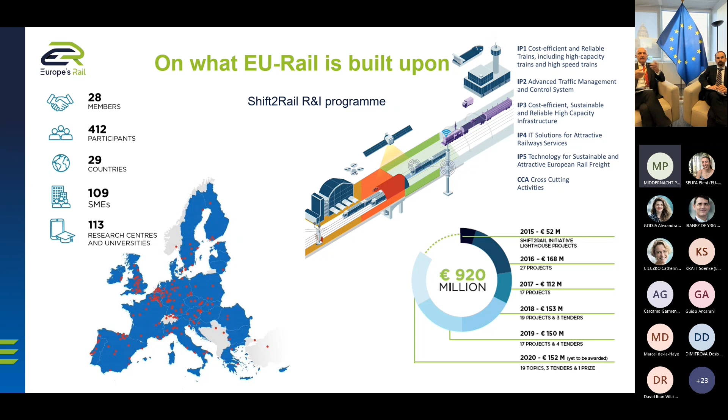The Master Plan and Multi-Annual Action Plan, the Multi-Annual Work Program of Europe's Rail, have been designed based on the results and the progress achieved by Shift to Rail.

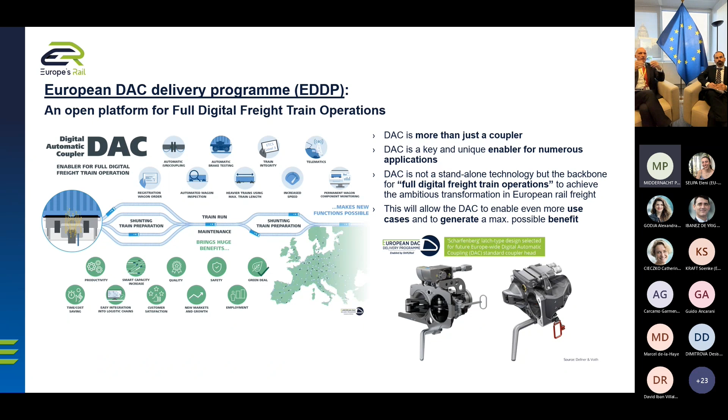I think this is a good example of the transition between the two programs. So now, as we start to discuss Europe's Rail, as I said, it's not a breaking point, it's simply an evolution from Shift to Rail to Europe's Rail. This evolution is in line perfectly with the evolution happening in the European Union, where the focus has been more and more on addressing the climate change impact and its consequences.

This came with the introduction of the European Green Deal by President von der Leyen, which later evolved into different elements of the policies of the European Union, one in particular the Sustainable and Smart Mobility Strategy, which is about how mobility and transport will have to evolve to become sustainable and smarter.

If you look at this document, I think it's quite interesting to see that the sustainability referred to rail is not about the fact that rail has to become greener and greener. Today, rail is green, is sustainable - well, unless you walk or take a bike. And yes, we need to do our due diligence, because there are a few elements we need to address.

First of all, we still have fossil fuel trains, largely diesel trains. We still have energy consumption that can be substantially improved in terms of efficiency. But what appears clearly from the Sustainable and Smart Mobility Strategy of the European Commission is that rail is the key agent for the overall achievement of sustainable transport and mobility.

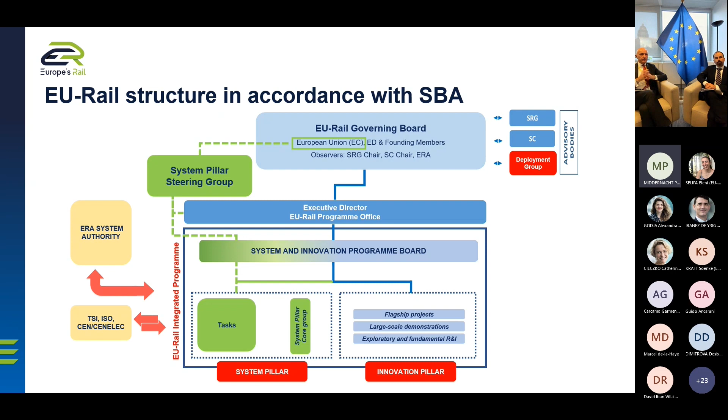But I would also like to highlight the relationship that is really fundamental with the state representative group, because rail is built upon the national system and national decision-making, and especially with the European Union Agency for Railways as a system authority for ERTMS, as for interoperability, safety and security. These are the key areas where we are working.

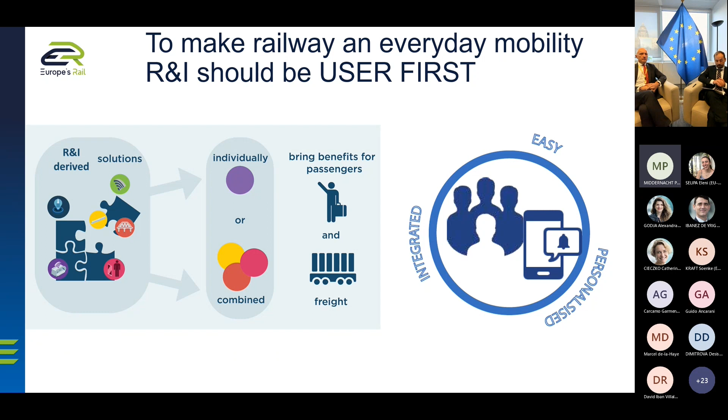If we go to the next slide, this one is most probably for the engineers, but especially to attract those who today maybe are not yet convinced that the future is rail—especially the younger generation, because we need to bring into the rail system all the brilliant minds that are looking at different ways of applying technologies, especially digitalization.

The rail system, if you look at it, is the perfect environment, the perfect test bed for playing with digitalization. Why am I saying this? Again, probably obvious for many of you, but it's good to put on paper: rail is a network, rail is a system, rail is supervised, rail is predictive. All of these are key ingredients to make a digital transition and make use of the digital functionalities we've seen, unfortunately, during the pandemic, but that were very useful.

For example, today we're using digital means ourselves. But also, to attract everybody, rail is green. Carlo mentioned it—it's already the next generation sustainable system, but we need to make it next generation as well.

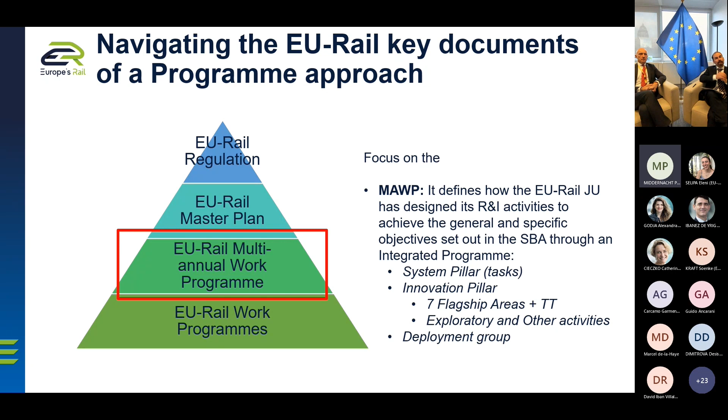If we go to the next slide, we can see that in the multi-annual work program we have 7 flagship areas. Those 7 flagship areas derive from the 5 priority areas that Carlo presented to you before, and without surprise, you can see a lot of analogies already from the titles.

Carlo also mentioned that we have granted the first project today with flagship project 1. So for each flagship area, there will be a flagship project, and in particular with flagship project 1, we're looking into different areas.

So we're looking into traffic planning, really trying to look at how to improve the strategic planning and the tactical planning of the availability of the capacity of the network, but this in a cross-border thinking. So it is not only about improving this strategic and tactical planning, including timetable optimization at national level, but also looking at how it integrates internationally at European Union scale.

And all of this we will integrate, of course, simulation and data-driven operations to make sure that we can have an efficient system. After the planning, there is the operation.

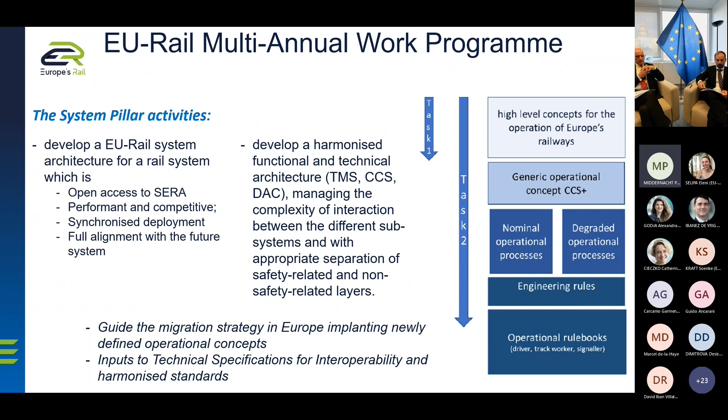If you go to the next one, we can see how we intend to implement the Europe's Rail program. You've already heard me talking about the implementation of the innovation pillar activities in calls. The first call has already been launched and closed. The second call is ongoing, and it deals with the exploratory research activities and flagship area 7.

Every year we will also launch this type of exploratory calls on a regular basis. On flagship areas 1 to 6, plus the transversal topic activities, we have a more multi-annual approach, as I was mentioning before, and for this we are planning 3 waves of calls. The second wave for the flagship areas that will generate flagship projects is planned around 25-26, and the third one in 2027.

For the system pillar activities, we have implemented it through a framework procurement process, and therefore we have today a framework contract in place with all the activities that will be launched according to the different needs. Lastly, the deployment group is also a key activity that will allow us to kickstart the reflection on how we integrate all these innovative technologies and solutions that have been demonstrated into the system at the highest TRL level possible, how we migrate that and how we deploy it into the system.

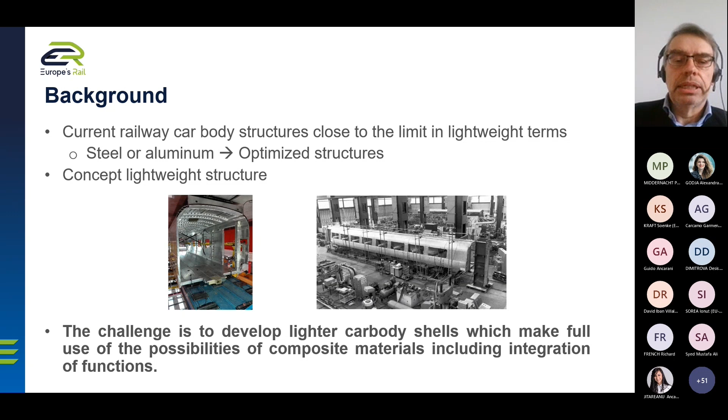Next slide, please. As already mentioned, why we are doing it.

Every saved kilogram is worth doing it, whether we look at the effect of reduced energy consumption from accelerating and braking less mass in the train set, or the possibility to introduce smaller traction systems and reduced braking systems since there's less mass to brake. Another side effect is that operation can be more efficient, as railway access fees would be reduced depending on the model the infrastructure manager is using.

Another possibility to reduce energy consumption is to look at the specific energy consumption per passenger per kilometer. If we invest a saved kilogram into carrying more people, the specific energy consumption will be reduced, and this ultimately leads to a more efficient and more attractive railway.

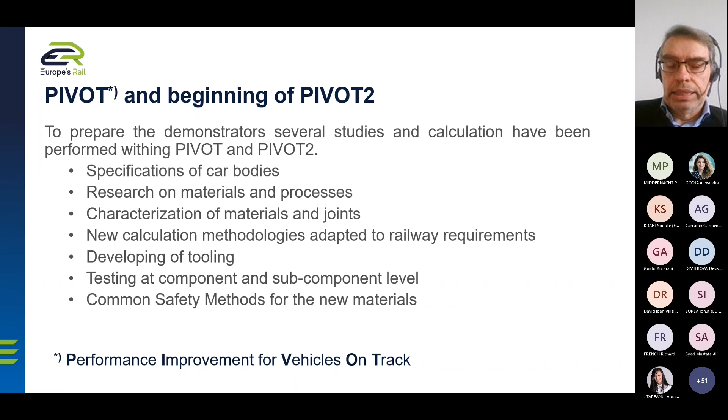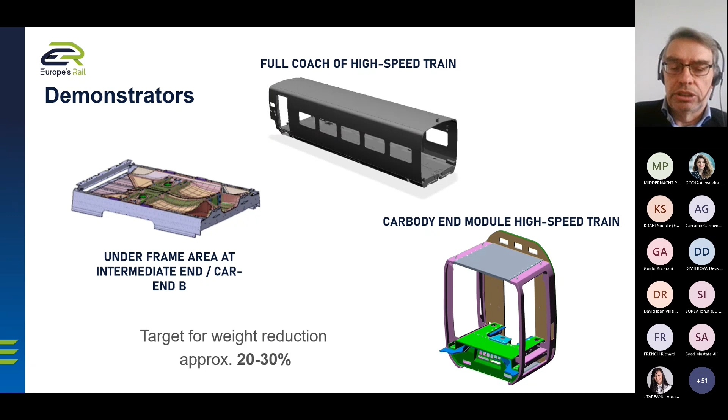Last but not least, Talgo developed a full coach of a high-speed train set, a roughly 13-meter-long high-speed car body which is under preparation. The target weight reduction we already achieved for each component or module is 20 to 30%, which is rather important.

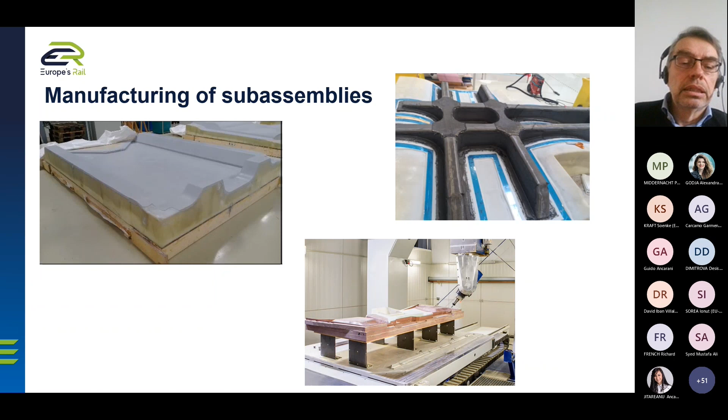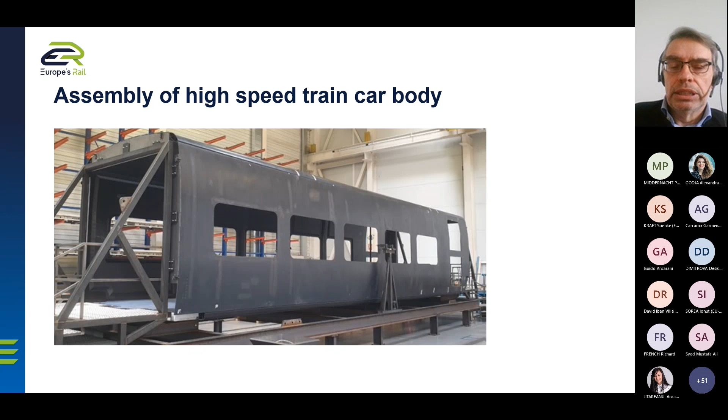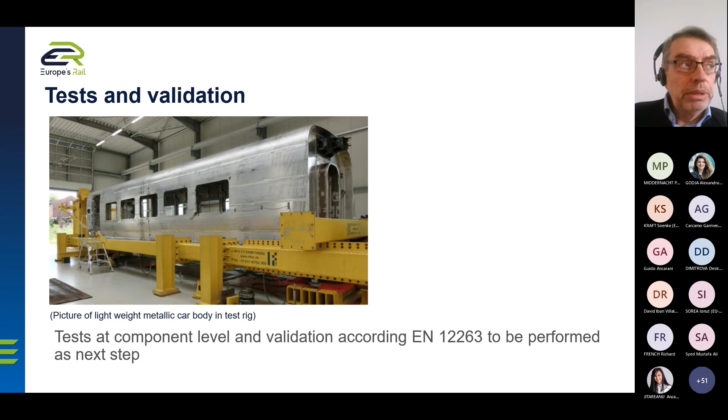A very important point when introducing new materials is the question of homologation and standardization. Railway people are very conservative, which is important given that we carry a lot of people and want very reliable and safe systems. So standardization is very important, and these new materials have to cope with all the relevant requirements in the rail system.

To begin with structural strength, fire resistance, and so forth. All these things are covered in standardization work, and the new materials are brought into the various standardization bodies.

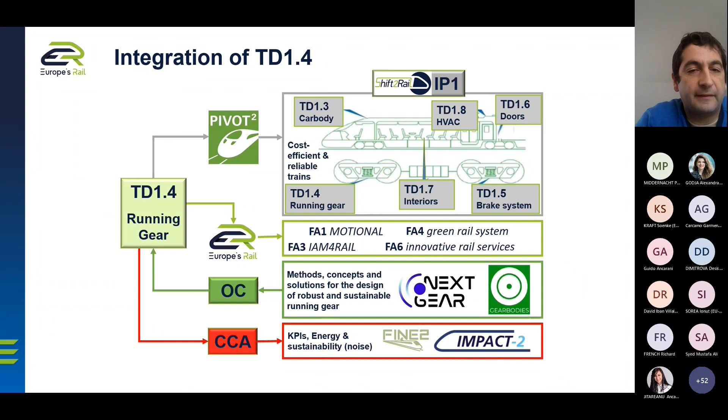In a first step, we have been constructing physical models, detailed models of the phenomena that we want to analyze. The purpose of these models is various. First, it allows us to understand the problem, how the different problems affect the variables we can measure, the signal of the accelerometers, the signal of the strains, and it allows us to analyze where to put the sensors, where we can have more sensibility, and so on.

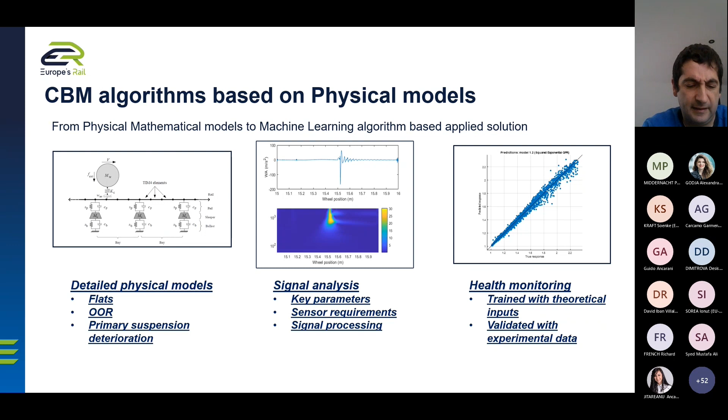In the next slide, we can see that this wayside system has already been installed on a real track in Metro Bilbao, and currently it allows us to analyze the status of the primary suspension, if we have flats, if we have ovalization, if we have out of roundness.

As I have said, the system has been installed, and we have validated the results of the new wayside system with experimental laboratory tests. So when we have detected a problem, for example in the primary suspension, we have taken that primary suspension and analyzed it in a laboratory test, in order to check if the results we are obtaining with the wayside system are correct or not.

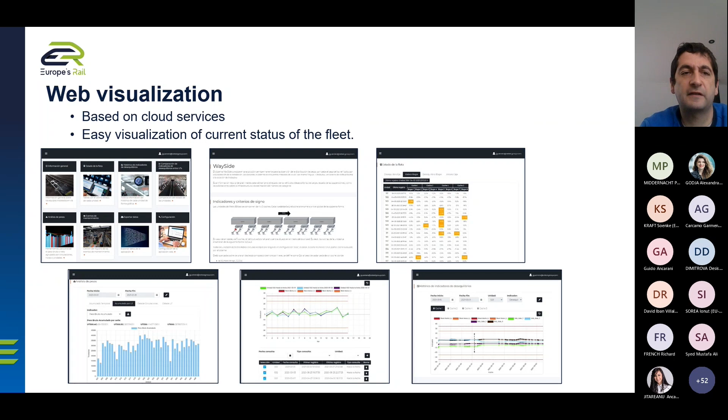And finally, in the next slide, we can see that although most of the calculations are done in the wayside system, the key results of the wayside system are sent to a data pool in the cloud, and we have constructed a front end in order to easily visualize the current status of all the fleet. So with this, I finish the description of the first innovation, and I give the floor to Richard, who will continue now.

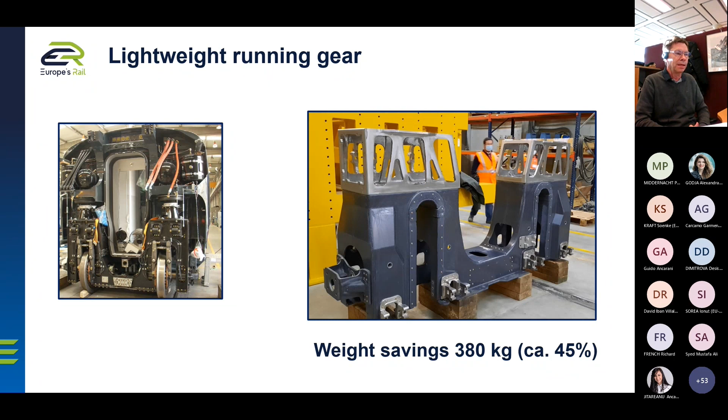So please advance to the next slide. Talgo has produced two prototypes.

The first prototype was intended for static strength testing, where they tested exceptional loads, service loads, braking loads, and a 30% increase in loads.

The second prototype was subject to fatigue strength testing: 10 million cycles total, 6 million in normal load, 2 million cycles in increased load, and 2 million cycles at 40% increased load.

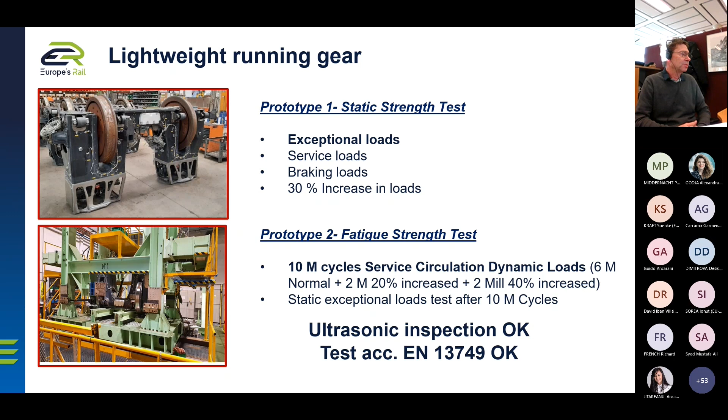After that, they also performed static exceptional load testing after the 10 million cycles, and performed ultrasonic inspections, and everything was found to be okay. They referred to an EN standard for bogies, 13749, which they used as the only applicable standard today. So please advance to the next slide.

So please advance to the next slide. The next example is a cooperation between Pivot 2 and NextGear. You will hear more details about NextGear later on, but I will give you an overview.

Cost and weight reduction, introducing single axle running gears in metro trains. Energy and maintenance costs constitute a large part of the recurring cost for railway operation, and vehicle weight impacts both energy consumption directly and the need for tamping of the track.

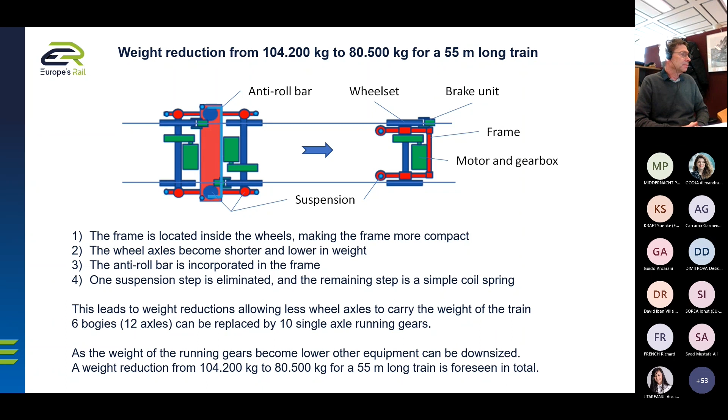To make that possible, let's go to the next slide. We need two things. First, we need to solve the ride comfort, and ride comfort is related to having only one suspension step, which makes it very difficult to get good ride comfort.

The solution here to add an active system means more or less replacing the conventional shock absorber with an actuator, a small size actuator. This low force suspension is intended to improve the ride comfort.

You can see the diagram showing the limit of ride comfort, which I calculated as the NMV comfort limit, is 2.5. The diagrams show the passive vehicle and also the controlled vehicle. So now we're meeting the target on ride comfort.

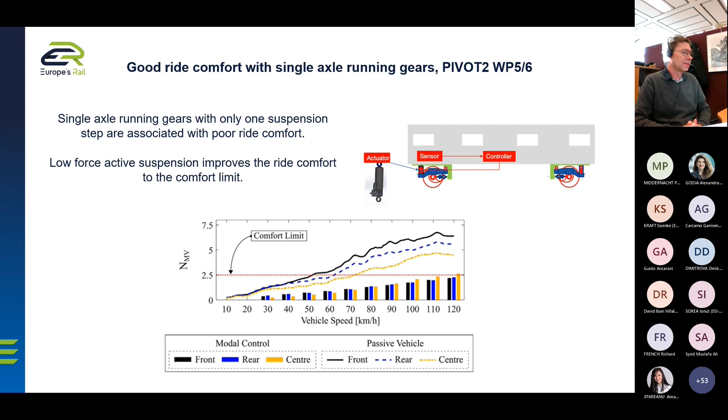There is also another important part, which is that we need to control the wheelset steering. That is also part of Pivot 2, but not taken up here. There will be some details on that in the next presentation. So please advance to the next slide.

The cost reduction is not directly related to the running gear itself, but it's also related to the fact that we can reduce the energy consumption. The reduced weight will reduce the energy consumption by about 5,000 euros per year and train set. It will also reduce the track maintenance by about 10 kilo-euros per year and train set.

The improved curving performance, which comes with the active steering, will also reduce energy consumption, wheel wear, and track maintenance. In total, we get a cost reduction of about 50,000 euros per year and train set.

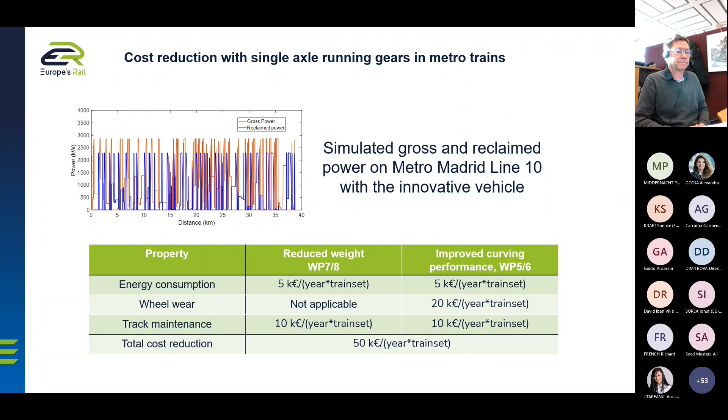So this was the last picture in my presentation. Thank you for listening.

Thank you very much, Richard, for the presentation, for the insights on the activities being done on running gear topics. We are now changing and linking these important actions on how energy reduction and energy consumption is linked to those activities within the project. We will go a bit more into depth later on.

Now we change topics a bit. We're trying to access the train at the moment. Thierry Montanet is the TD leader for the innovation doors activities and entrance systems within Shift2Rail, and he will give us some insights on the activities we have been developing within the projects. Later on Robert will also touch upon the interiors and the modular interiors we have been working on. So Thierry, thank you for joining us today, and the floor is yours. You have the go right now.

Thank you very much. Okay, thank you, Javier. So I present now the subject that has been addressed during the TD 1.6 on innovative doors. So what are the purpose and target of the project? Can you go next? Okay.

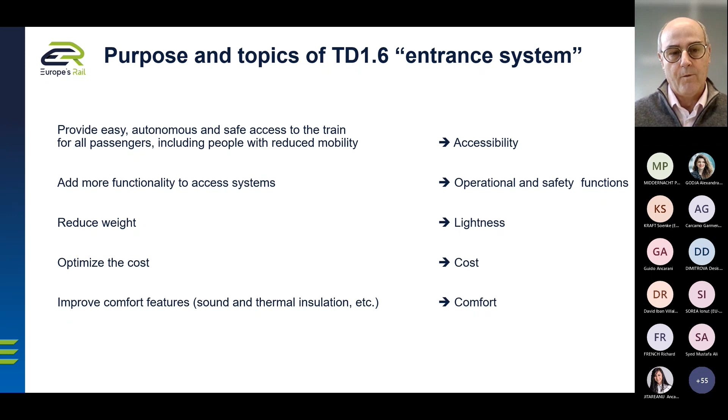Another topic is lightness, because it is an important topic - we will speak about that at the end of the presentation. Of course a main constraint is to optimize the cost. And another target is to improve the comfort, and for comfort we speak about sound and thermal insulation.

Next, please. So in TD 1.6, different projects have been involved. The first one is Mat4Rail. So next, please.

Mat4Rail works on innovative doors with a long-term innovative design. The first study works on composite - they have proposed to use a core that has been machined and also use the SQRTM process to design and manufacture the door leaf. In Pivot 2, we use a very close process. So it's interesting that researchers for the long term have made the same choice that we have done in Pivot 2.

A second interesting proposal is to use additive manufacturing - they propose that the core of the door leaves be manufactured with a lattice structure in plastic reinforced with fiber. It is a long-term proposal because today we cannot use this process in trains, because we cannot manufacture the size of the door leaves compliant with fire and smoke constraints. So it's long term, but interesting to have in mind for future development.

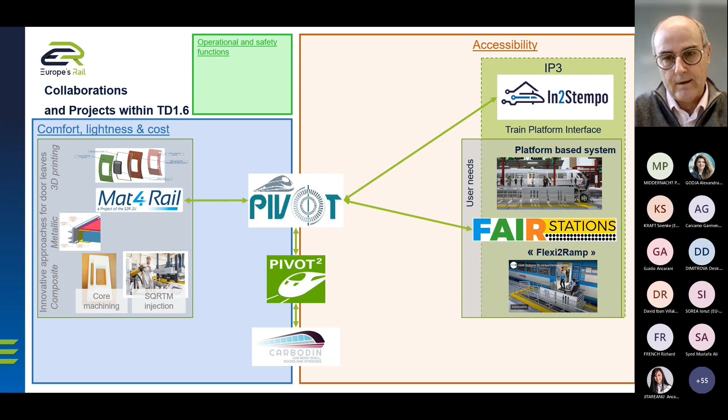During the Pivot project, we have studied a solution to install in the train, no more on the platform, but now in the train, to solve and reduce the offset and gaps between the platform and the door threshold.

The concept we have studied is an internal ramp. That means the floor inside the train is moving, and in addition there is an extension with an external ramp.

At the end, we have not developed that system because it is very complex and very costly, with a very important cost, and there are a lot of difficulties to implement such a system inside the train.

Next, please. So during the Pivot 2 project, we continue the accessibility topics by improving the design of the bridging plate, and also designing a new concept of door thresholds, mainly for sliding doors, that means for metros or commuter trains equipped with sliding doors.

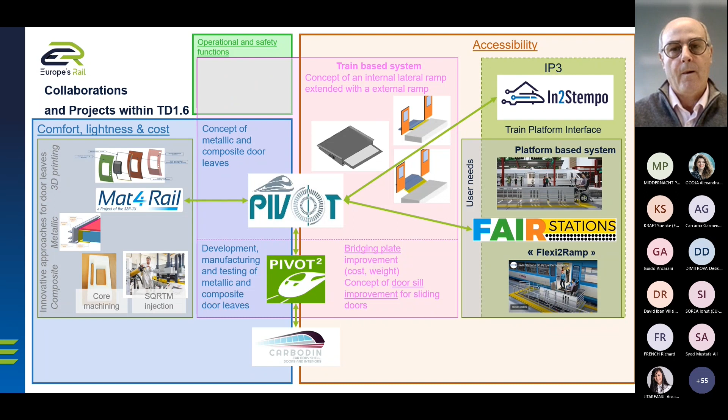The main activities we perform during Pivot and Pivot 2 are dedicated to improving the comfort and lightness of the door leaves. That subject has been addressed with a new design of the frame of the leaves and the design of the insulation. In parallel of Pivot, the Carbodin project also works on the door leaf, but you will have a dedicated presentation after.

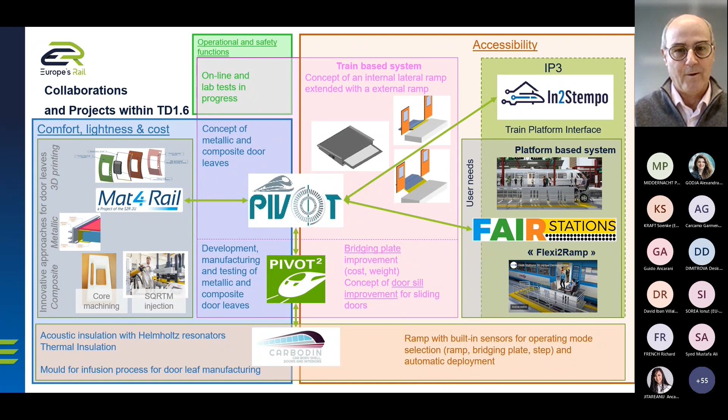I don't speak a lot about operational and safety functions because the result is not known at this stage. You will have the result during the final meeting of the Pivot 2 project.

So what have we learned about the door leaves? About the metallic door leaves, we have improved the acoustic insulation using a mix of rigid and soft foams, because rigid foam has poor acoustic insulation but interesting mechanical performance, while soft foam has the reverse, the opposite performance. So it is interesting to mix rigid and soft foam.

Using that, we have increased the acoustic insulation by about 3 dB. About thermal insulation, we have designed insulated pillars using aluminum profile and a core made with plastic honeycomb, and with that we have improved the thermal insulation by about 19%.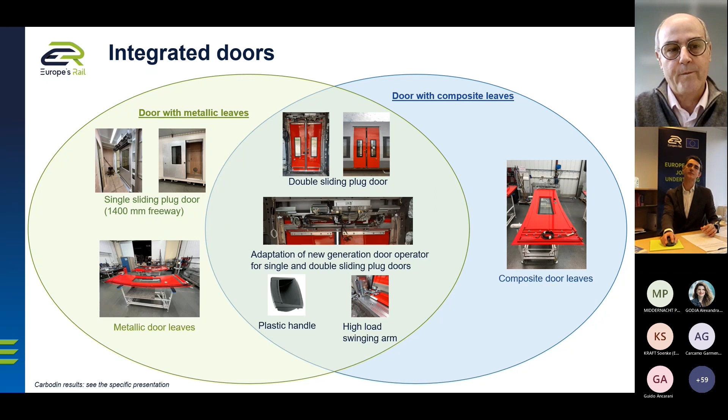With this common part, we designed the metallic and composite door leaves, which we installed first on a train, in fact a static train, and we performed different mock-ups to conduct the tests.

The results of that are about the acoustic attenuation. It is interesting: we have an important improvement with the metallic solution, but not with the composite one.

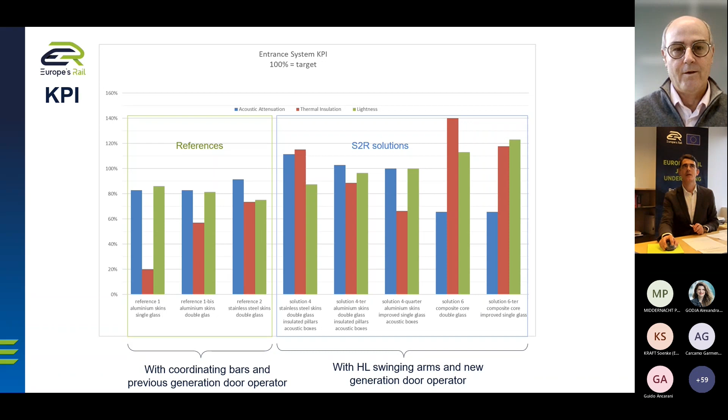Next, please. In parallel of that, we have made a study about energy reduction, which is now an important topic, and we have performed a life cycle assessment of the door. The result is that the energy consumption at the level of the door is mainly due to the distance traveled by the train, the electricity mix that we use, and the weight of the door.

We have not studied the consequence of the thermal insulation because for that we need to build a model of the train, and we have not the possibility to do that at this stage.

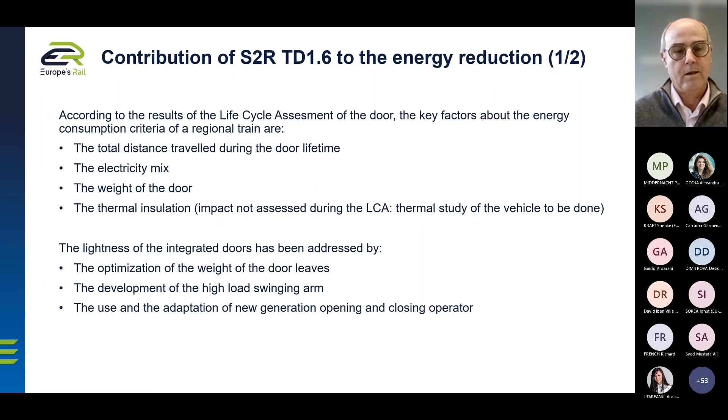What I can add is that the opening and closing of the door does not require an important energy. So it is the reason why the main topic that we can address during the project is the weight, and we have done that, improving the weight of the door leaves and the different equipment.

At the end, at the door level, the energy reduction is about 16% for the metallic solution, and about 40% for the composite solutions. So thank you for your attention.

Thierry, thank you very much for the detailed presentation and the activities within the different projects you have been addressing, and also making reference to the door leaves you were showing for the colleagues that had the chance to attend last InnoTrans. Yes, we were able to show the doors over there and how these improvements on the doors, without jeopardizing anything, by making these developments on the solutions implemented, are improving those externalities and making them not so annoying for the travelers. So in that sense, thank you very much, Thierry, for the presentation.

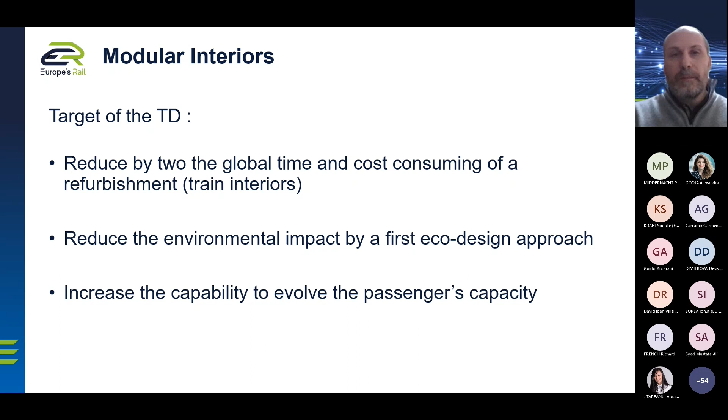Next slide, please. At the end of Pivot 2, the main target was technical and economical, and so we have almost divided by 2 the global cost of the interiors, and also the number of pieces. This is important because it's very linked, but it is also linked to the target of environmental impact.

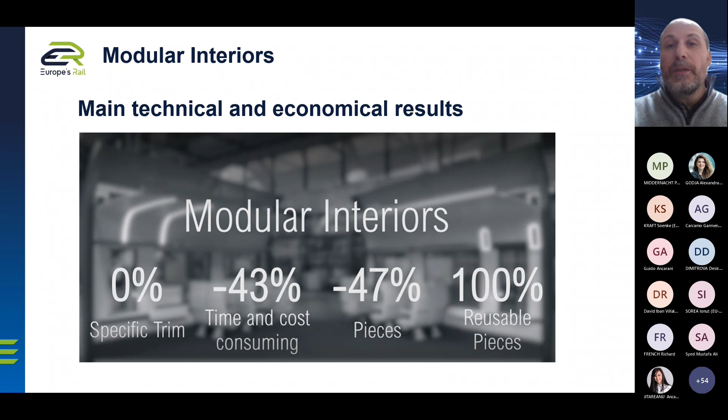And for this, we have built 2 concepts, and to explain it, I will take time to explain the current situation. So next slide, yes. It's not so okay.

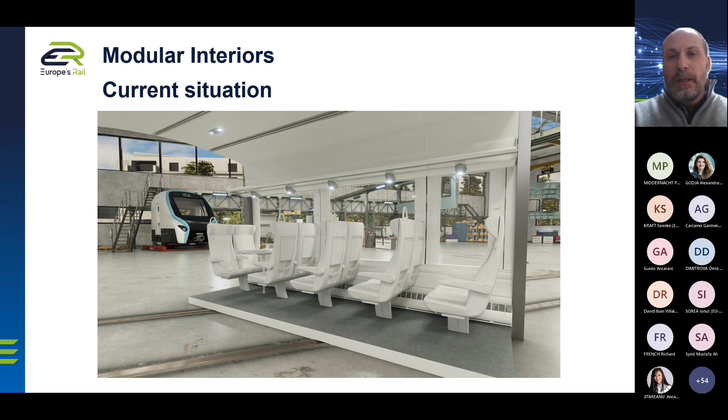The current situation in interiors: we have a seat in a passenger room, and if we want to change all the space or only part of the space, and for example add a bicycle rack, we need not only to change the seat, we need also to modify several pieces.

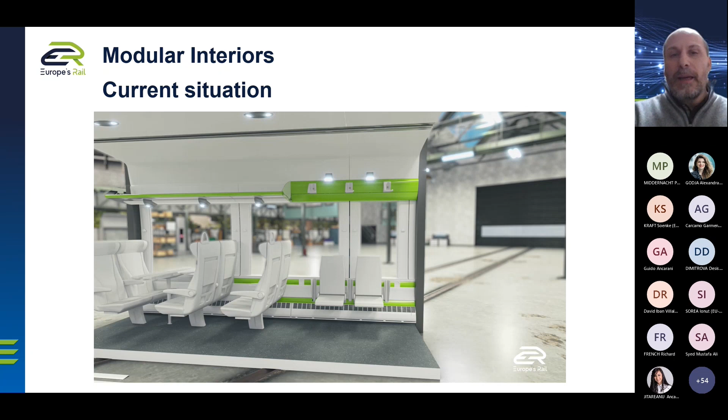So next slide, please. And each piece you see in green is a new piece for the bicycle rack. This is the case for each new demand, each new interior we had. So at the end, it's very costly in time and costly to build. And the target was to think differently, and to accept that we have a direct access to the fixation and no more need to add the fixation system. So please, next slide.

So concept one was to attach the equipment to two bars, a low bar and a high bar. This way we have direct access to the equipment, and we save a lot of time, but we also simplify the design of the panels and reduce the number of panels, because we no longer need to hide the fixation system with other panels. That's why at the end we have reduced the number of panels a lot.

For concept 2, next slide. We have the same logic of design, but in this case we have directly a beam, and we fix all the equipment to this beam. So with these two concepts, we have simplified the design, reduced the number of pieces, and with this we have also simplified the molds, which is why we have reduced the total cost of the interiors.

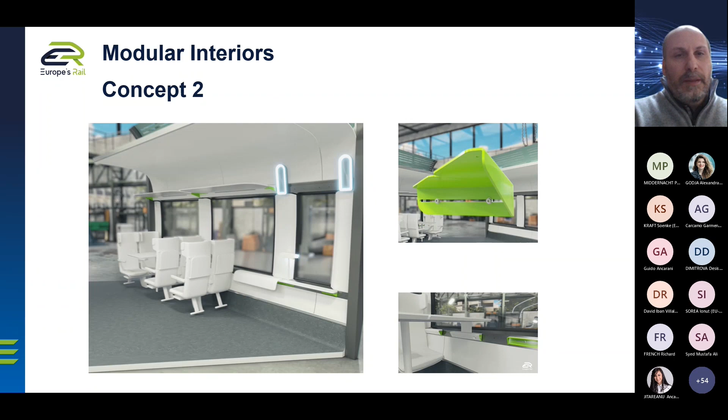Next slide. If we look at the whole life of the train, currently we have only one big refurbishment at the mid-life of the train. So we have analyzed the impact of the current situation and the two new concepts during all these steps in the life of the train. We did an LCA specifically for the current situation, the AGC, and for concept 1, C1, and concept 2, C2. Next slide please.

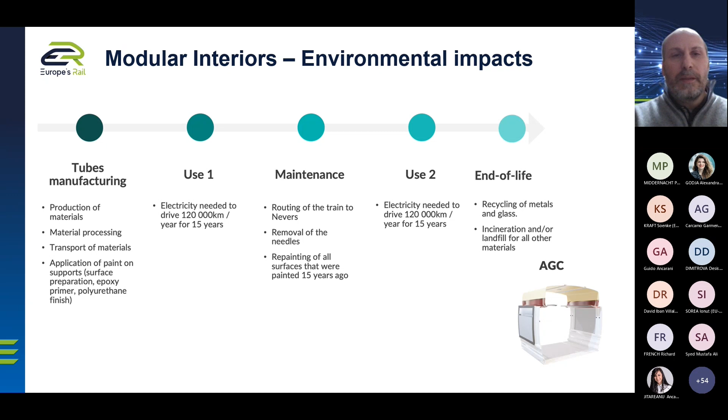So we have worked on two topics. The first one was to reduce the weight. With Aernova, our partner, we have decided to use a lighter material, but one that is easy to build, and easy to build the mold for as well. At the end, we have reduced the weight by a factor of 2, depending on the concept, and more than 2 for one of them.

This has a global impact on environmental indicators, and by reducing the number of pieces, we also have an important impact across all phases of the life cycle, especially in the use phase and the manufacturing phase. So globally, we have a coherent final design.

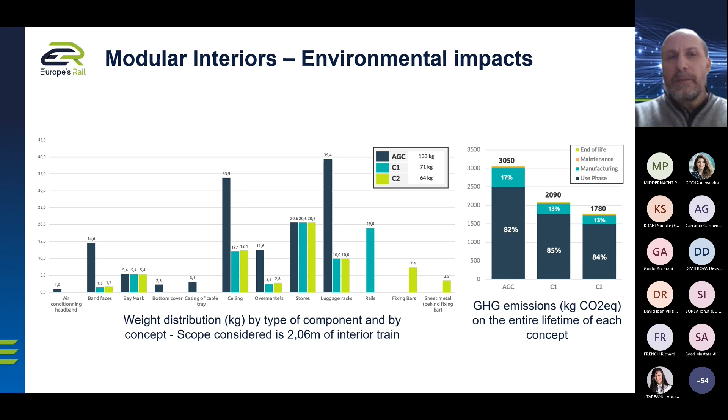So we can move to the conclusions, next slide please. There is an important impact on weight, an important impact on all the environmental indicators, and we keep attractive interiors and the capability to adapt the interiors to demand. Because we only have a view of 5 years for passenger demand, it's important to have the capability to respond to this new demand.

But Shift2Rail and Pivot was the first step of this new design. We will continue the work in Europe's Rail, FA4, about sustainability, especially to integrate now the components, so the seat, the luggage rack, etc., and also to show how circular economy could drive the design. This will probably push a new way of designing interiors for passengers, with new materials but also probably new finishing.

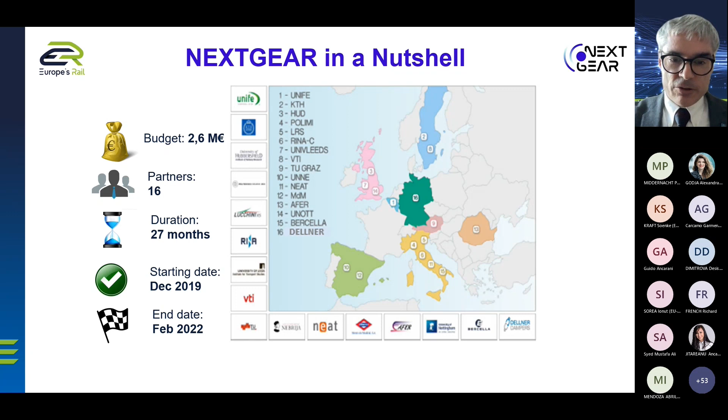As you can see on the first slide, this was a 2-year project, a little bit extended because of Corona, and it ended in February this year. We had 16 partners, and as you see on the next slide, we think we had a good mix of universities, research institutes, and industry. We also had an operator, Metro Madrid, as a vehicle operator, which was quite important for the project. The coordinator was UNIFE, and the technical leadership was with my university, KTH, in Stockholm.

If you go to the next slide, there were 4 high-level objectives. The first 3 are very tangible: we intended to work with novel materials and also new manufacturing methods. We worked on active suspensions, both software and hardware, controllers, actuators, and how to control vehicles. We developed the concept for the wheel set of the future, and all this circled around, as you can see in the center, the next version of the universal cost model, which you can use to evaluate all the innovations that we proposed.

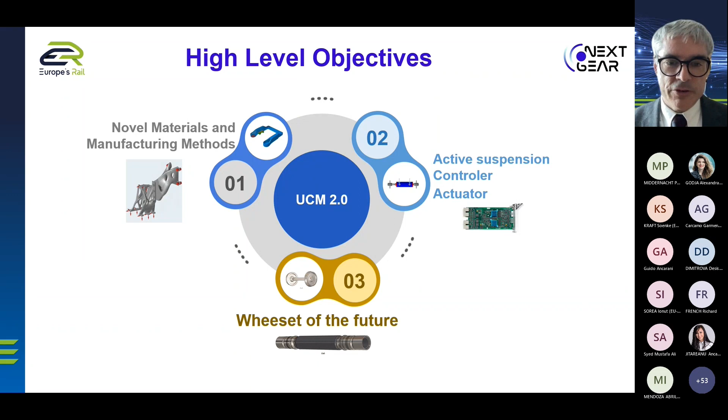Now let me first summarize the most important results from the project before I go a little bit more into the details. As an application example for additive manufacturing, we chose an antenna bracket. We designed it, we actually manufactured it, and it was also shortly tested dynamically on a metro train in Madrid, and we achieved a 60% weight reduction compared to the existing component.

We also conceptualized, designed, and manufactured a carbon fiber composite bogie frame, which had a 50% reduced mass compared to a comparable one in steel. We designed a virtual demonstrator of a hybrid metallic composite wheel set, where we achieved more than 60% weight reduction. And we came up with the concept of a 2-axle single-stage suspended vehicle where we foresee a 400 kilogram per meter weight reduction.

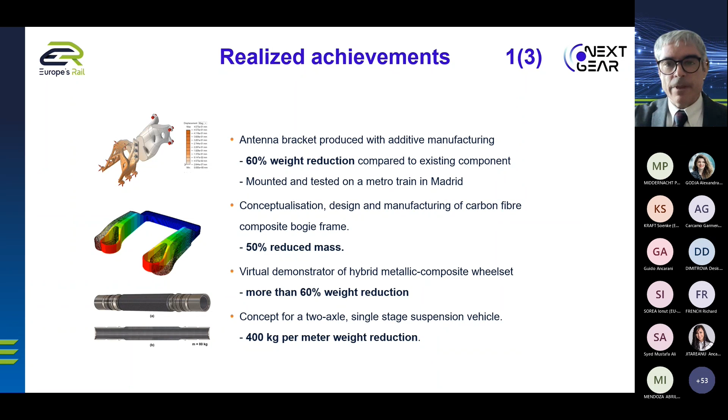So you see most of what we worked on in the project is aimed to reduce the weight of future vehicles. And at the end of my presentation, you will also see how it influences the energy consumption of a train ride.

When it comes to active suspension, as I said, we worked both on hardware and software. Here you can see part of a controller, a CL4 controller that was developed, and on the right-hand side you can see a new type of actuator that was also built by the company Dellner and tested in laboratory. So here too, a real component was manufactured.

And when it comes to the universal cost model, we designed a completely new user interface. It's an Excel-based tool that will be available for everyone. It included a quite sophisticated procedure for damage modeling of switches and crossings, which was not in the first version of the tool. And it enabled us to test the cost implications of the innovations we proposed in the project, and also some other Shift2Rail proposed innovations with this model.

All of this I will talk a little bit more about in the coming minutes, of course.

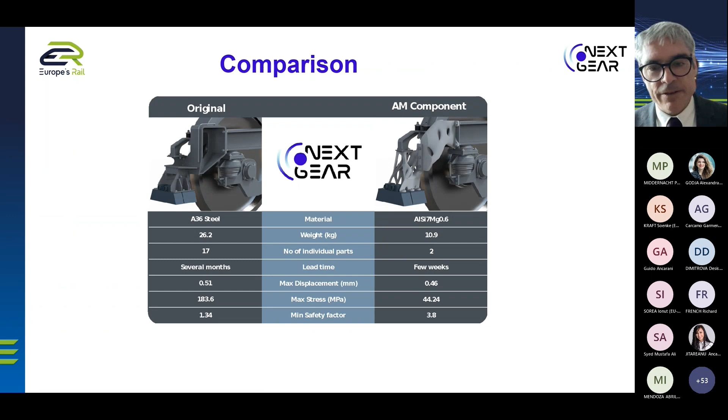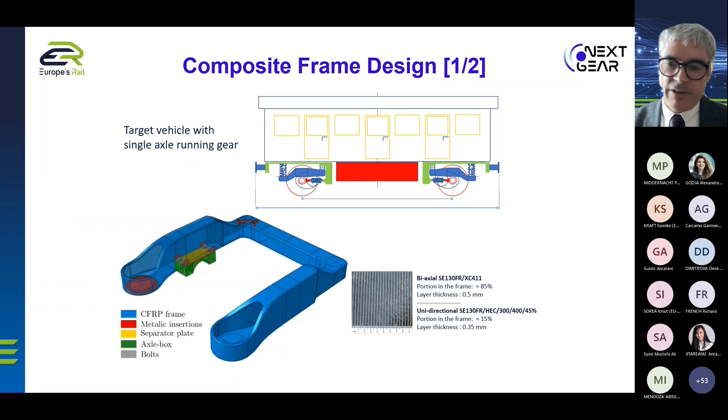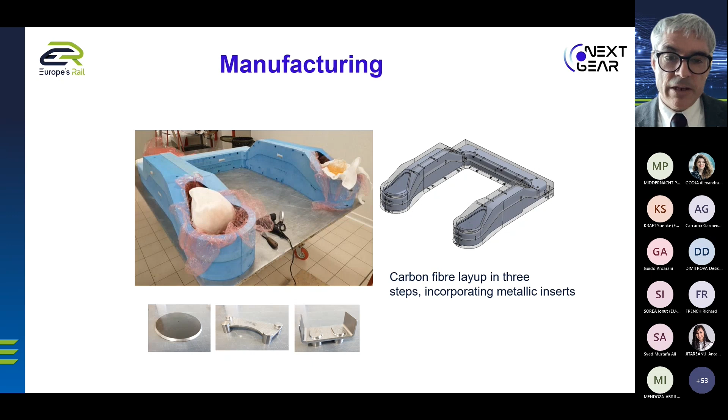Here you can see that the bogie frame was designed. We did extensive finite element simulations, and then it was actually manufactured by the Italian company Bercella and then shipped to our laboratory, where we did some dynamic testing, static and dynamic testing. You can see it also had some metallic inserts here.

As said, we did some static and dynamic tests, and we could see that it fulfilled the requirements, and it also had the properties that we predicted in our simulation models. This is, for example, a twisting test. I said in the beginning that this frame also is an anti-roll bar, and the torsional stiffness was almost exactly as we predicted in the finite element models.

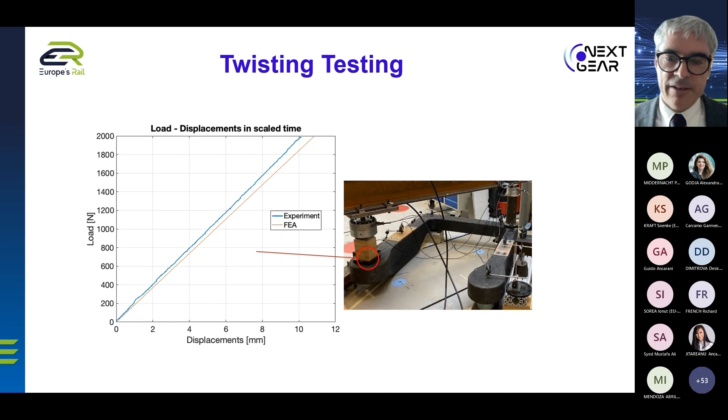As I said, this bogie frame was part of a completely new vehicle concept, a two-axle vehicle as an alternative to the existing Metro Madrid rolling stock. We foresee a great potential for a good business case here, but we had to work on two deficiencies that this type of vehicle has compared to conventional bogie based rolling stock.

The ride comfort is less good because there is not primary and secondary suspension, but just one suspension step, and because it is not an ordinary bogie vehicle and there's a long distance between the two axles, the curving performance will be deteriorated. Both those deficiencies have to be worked on and can be dealt with by introducing active suspension in the vehicle.

And that we did. Here I will just shortly mention the actuation for the curve steering that we worked on in the project. As you can see, two actuators are implemented, and new actuators were designed especially for this purpose, linear actuators, tested in the laboratory to force the wheel sets into a radial position in the curve to minimize wear and risk for rolling contact fatigue on both wheels and rails.

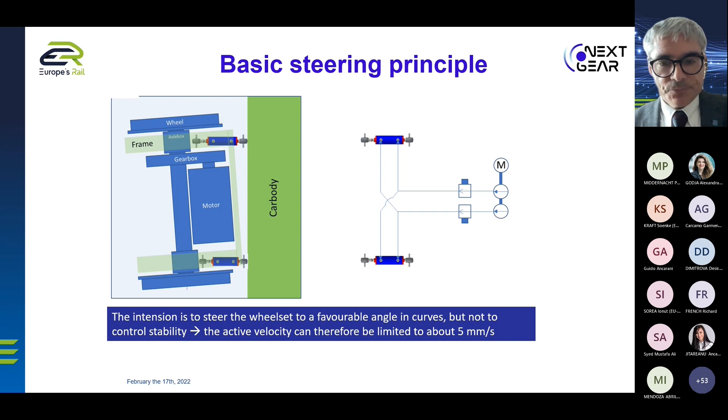The final technical part of the project was the so-called wheel set of the future, where we developed a virtual demonstrator. In that work package, we didn't have the possibility to really manufacture the wheel set, but we did quite extensive studies. The benchmark was an inboard bearing wheel set from Lucchini, and the axle of that wheel set has a mass, the steel axle has a mass of about 200 kilograms, as you can see here.

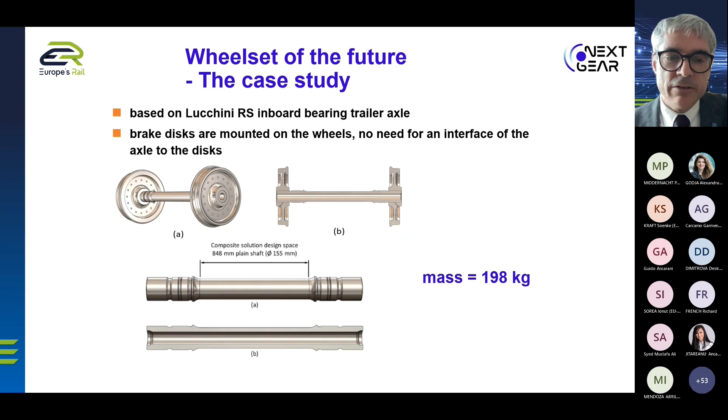We started with 3 different concepts and made a rough evaluation from the beginning. We had, for example, in the center, the lowest cost concept, but in the end, since weight reduction and reduction of energy consumption was very important in the project, we went for concept number 3, which promised the lowest mass, a 60% mass reduction. With that concept, we then made all the detailed studies.

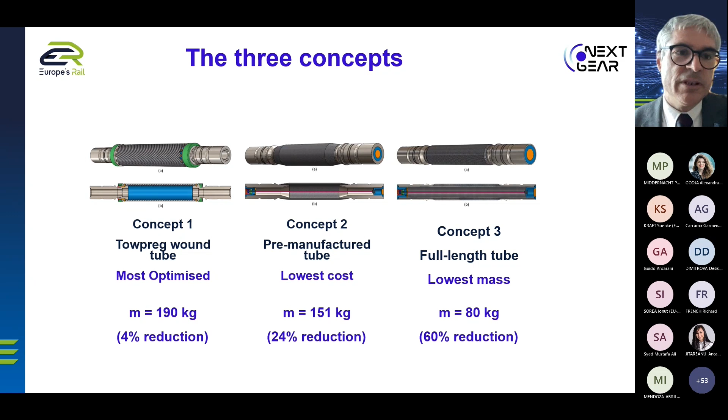The concept is a hybrid metal composite axle, and there's a continuous composite tube, full length, the length of the full axle. Then you have to have thin-walled collars bonded on each side for fitting the bearings and the wheels.

Adhesive bonding is foreseen to be used to join the inner tube to the collars. And then there's also a secondary composite tube needed in the central portion of the axle to meet the bending stiffness requirements. As indicated from the beginning, that axle is just 80 kilograms according to our design studies, a 60% mass reduction. When it comes to the whole wheel set, there are also the bearings and the wheels, then we still have a 12% weight reduction compared to the benchmark axle, the inboard bearing axle from Lucchini.

With that concept, we did a lot of design studies. We designed this, calculated the statics and dynamics of that axle. We made detailed proposals about a possible manufacturing process. We made an impact analysis, since an axle could, for example, be hit by ballast stones or other things.

The final part of the project that I want to present is the Universal Cost Model 2.0, as we call it, because the first version was developed in an earlier Shift2Rail project called Roll2Rail. Our task was to make it much more user friendly and to add some features that were not really in the first part of the model.

The basic idea is to make it easy to compare the life cycle costs of an innovation compared to an existing design. Historically, it has shown up that innovations that have been proposed in research projects didn't have it so easy to make it into the market.

Some reasons for that are that the initial cost can increase a bit, and the initial cost is very much with the vehicle operator, but the benefits of reduced operational costs, which often means reduced maintenance cost, are at least partly with the infrastructure owner. Therefore a vehicle operator still makes the decision to buy the vehicle with the lowest initial cost.

And this tool should make it possible to show in a very easy way how the total life cycle costs of an innovation change the picture.

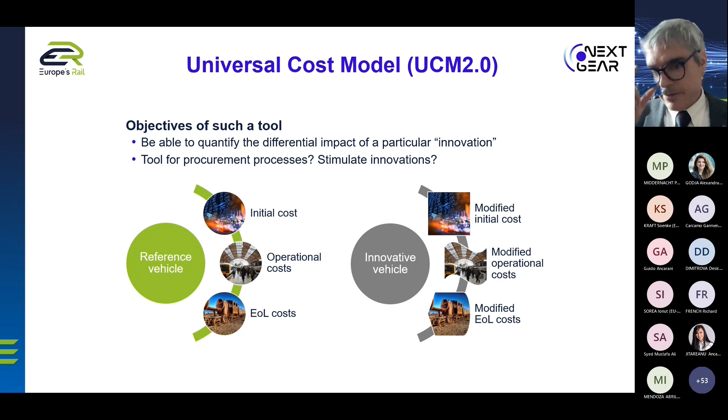On the next slide, you can see a little bit how the model should work. As I said, it's Excel based and it will be accessible for anyone. In that Excel tool, you have to calculate some performance indicators, for example, the wear rate in millimeters per kilometer, the crack propagation rate, the track settlement rate, energy consumption, sound power.

We also included hazards. And then there are instructions on how these exactly should be calculated for a reference vehicle and the new design. Then you can compare the investment, operation, and end of life costs, which then end up giving the total cost of ownership for that vehicle.

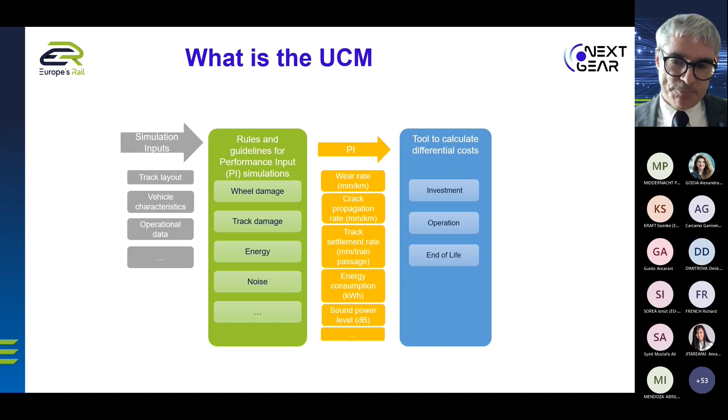When it comes to noise, we also tried to translate noise into a cost. There are different pass-by sound pressure levels defined for different areas like metropolitan, urban, and rural areas. That is also included now in the model.

On the final slides, you will be able to see some examples, or mainly one example, of how that tool can be used. We picked again the innovative single axle vehicle and compared it to the standard bogie and the existing Metro Madrid trains.

One train set, the conventional train, has 3 cars, and those are together 55 meters long, and the single-axle vehicle needs 5 coaches to transport the same amount of passengers. So that was what was compared.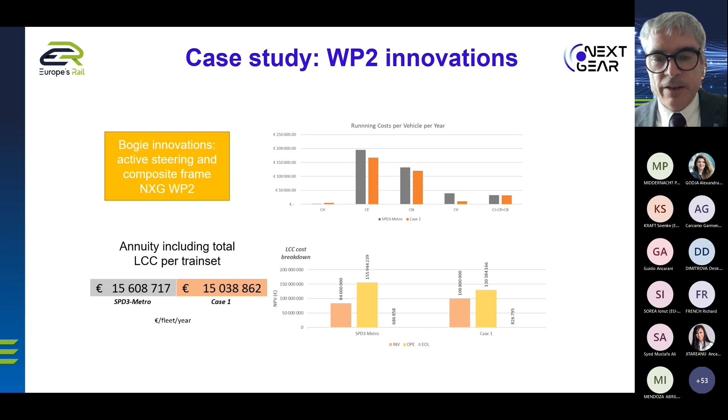Next slide. The final 2 slides in my presentation are dedicated to the specific reduction in energy consumption we think we can achieve with the innovations we propose here. First, we calculated for a run on Metro Madrid, on line 10, which we took as the reference. If you run on straight track, the innovative vehicle would reduce the energy consumption compared to the existing one by about 5%.

But then you also need to look at the additional energy consumption in curves. There's an additional curving resistance. Looking at all this, we calculated that all in all, we foresee a reduction in energy consumption of about 8%, or a saving of 10 kilo euros a year per train set. I tried in my head to recalculate this to something a little bit more tangible and came up with an extremely rough number.

But for the whole metro network in Madrid, that perhaps could translate into the energy consumption of 3,000 European households or so. But don't cite me on that number, that is a very rough calculation, of course, but just to give you an idea.

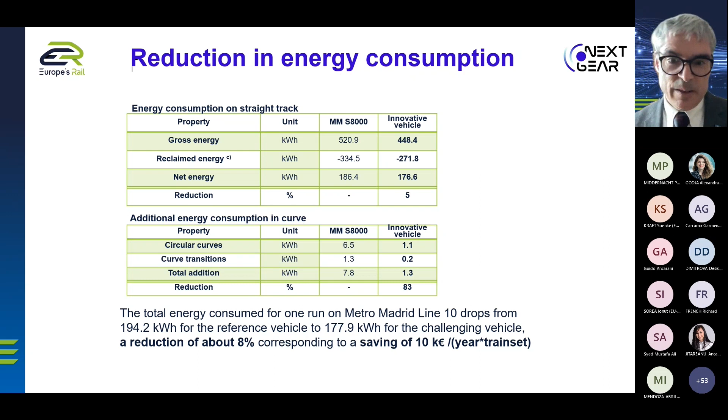And that was all I intended to present. So thank you very much for listening.

Thank you very much for your presentation. Just one question, as we were referring at the beginning, the collaboration that you had with the founding members of Shift2Rail - expecting additional questions later on - could you give a glimpse of how this collaboration was set up and how everything worked with the other members within Shift2Rail, before we pass to the last presentation of the session?

That cooperation was extremely important for us to get input from the vehicle manufacturers, the operators, and the infrastructure managers. For example, before we decided which application to use for additive manufacturing, we had meetings with the Pivot 2 consortium to ask for ideas, and together we decided on the antenna bracket.

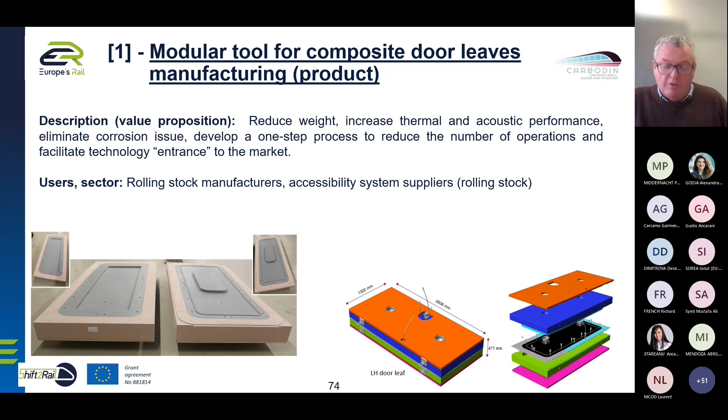So this will help us get door leaves quite quickly. The methodology helps us reduce the cost and the time to market for those components. Time to market availability of this methodology: 2023. Let's go to the next one.

An improved boarding device. I heard a few minutes ago someone from Pivot 2 speaking about this. So here we try to produce an example of what could be a boarding device for a train, for a commuter train, for people, for wheelchair users. The UIC Passenger Forum has organized several working groups with disabled people associations, wheelchair users, and so on. One of the challenges is to accommodate those commuters so that they can be as independent as possible when they use the trains.

Of course, we have to go on with the design of possible solutions, considering the different types of trains, the heights of the platform, which are quite different, and the train stop times in stations for short and regular trains. We also have to consider the safety of the customers by connection to the TCMS of the trains. But for me, this is a very nice first step of what could be done, and it's really interesting to go further on, considering the implementation on trains. Next, please.

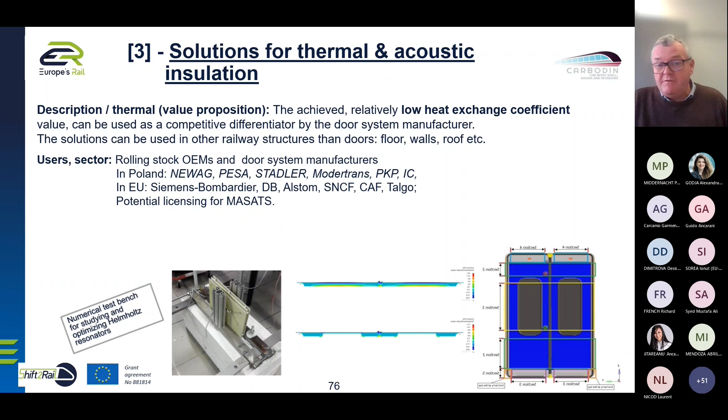Yes, we also spoke inside of Pivot 2 about thermal and acoustic insulation, so I will not spend too much time on this. Here we have a solution to reduce both of them. Of course, reduction of energy consumption and thermal comfort of the passengers is very important, especially in the areas near the doors. Availability of this type of solution, 2025 to 2027. Next, please.

So here we have a device concerning the thermal acoustic insulation. What we are trying to do is use Helmholtz resonators in the train structures to improve this. It's not really implemented yet, but it could be. This methodology will enable a quick design of acoustic wall structures for sound attenuation. Of course, the users will be designers of rolling stock, specifiers also of rolling stock, and all other sectors where walls with sound attenuation can be applied.

We know that RUs must have new walls installed inside trains to have the interiors adapted to the passengers' needs. That's what was said inside Pivot 2. The interiors have to be modified several times during the life of a train, every 10 to 12 years if I understand well. These are quite nice solutions that do not heavily increase the mass of the train, and give us a very nice level of comfort for our customers. Availability 2023 to 2024. Next, please.

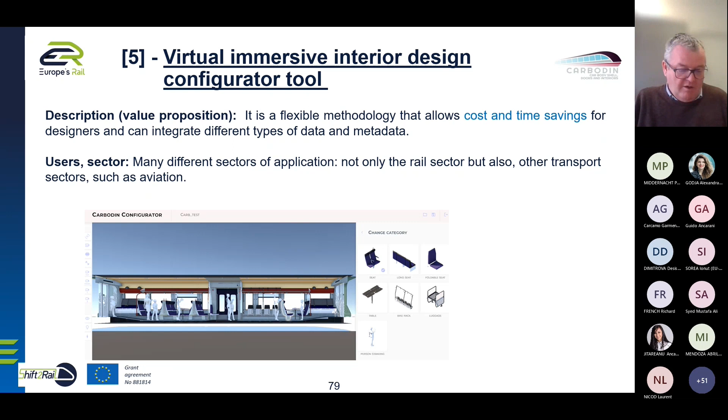Well, I was in charge in the past years of projects for refurbishments of French high-speed trains. I know it's quite complicated to come to a solution when everyone tries to understand how we are going to evaluate the interiors of a train. This methodology of virtual immersive interior design should be something really nice and could reduce the time needed for making the right decisions when a new train has to be bought or when retrofitting of an existing train has to be made. My former colleagues, or my former marketing colleagues, will probably completely agree with me on this. Next, please.

Here we're going more deeply into the detail of industrial production of parts. So we had very nice, very interesting work on infusion process simulations. Currently, the production of those parts is done by people who have a lot of experience and it needs a lot of testing and things like that. If we go to this new way of simulating what's going on in the molds, we shall also be able to select the best resin inlet and outlet positions, and so on.

It will be easier for everyone to come quickly to the right solution for the trains, whether new trains being built, or retrofitting, or maintenance of existing trains. So this will help reduce production prices and delays by avoiding parts of the testing that are currently done at the beginning of production. Next, please.

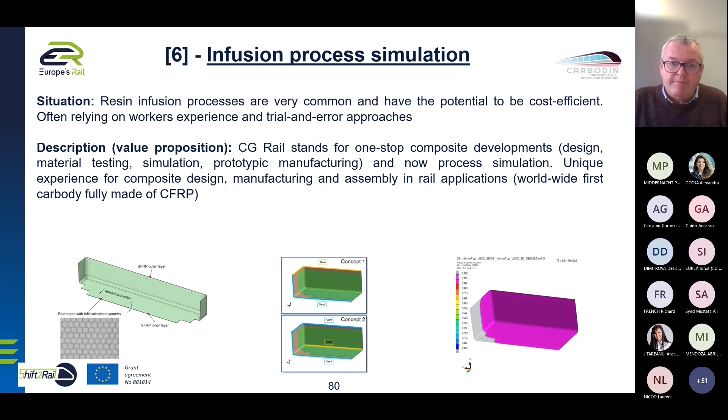I will not insist on this.

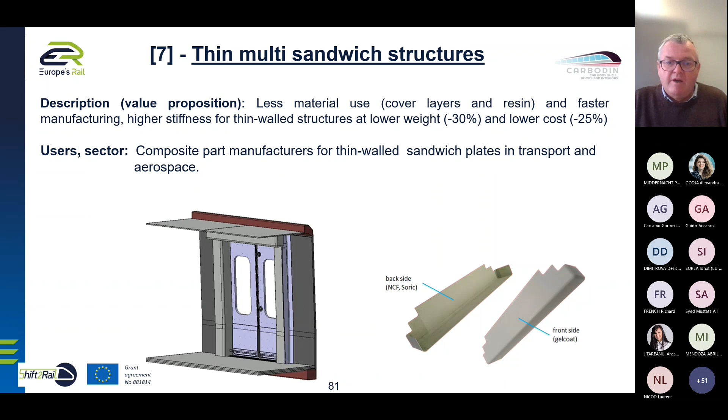Our colleagues from Pivot 2 explained a lot about the structures around the doors. Here you can find some examples, some solutions that can be quickly adapted to every situation. There is nothing to add to this. We are currently working on considering the outputs for Pivot 2, and so those are solutions to be applied, considering the solutions that are given to us by Pivot 2.

The next one is about structural health monitoring. Someone spoke about the maintenance of the car bodies, and here we have the possibility to monitor the behavior of these car bodies and identify clearly when something has to be done, because those maintenance activities are usually very time consuming, and we have to understand quickly when heavy maintenance of these parts is needed. So having those devices, having the possibility to monitor the car body, will be of the utmost importance for us.

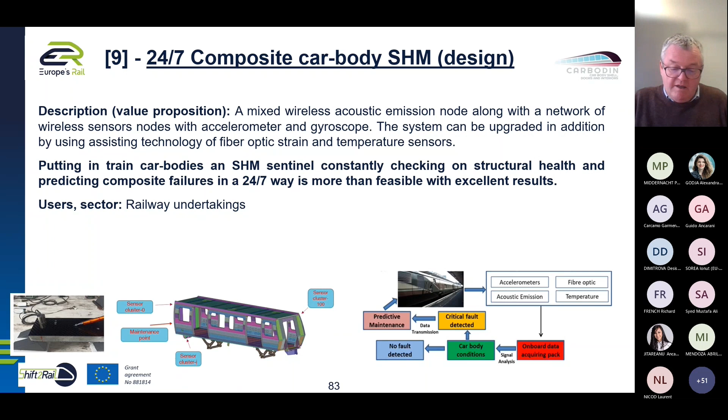Okay, let's go to the next one. Here we are also working on the optimization of the production process, the reduction of delays and costs. This will be available in 2024, 2025. As a maintenance expert dealing with those aspects, we had in the past, and we still have, issues with the inserts of the composite parts of the trains. So having these methodologies for dimensioning those inserts, we will be happy to avoid that kind of problem in the future. Available in 2024 to 2025.

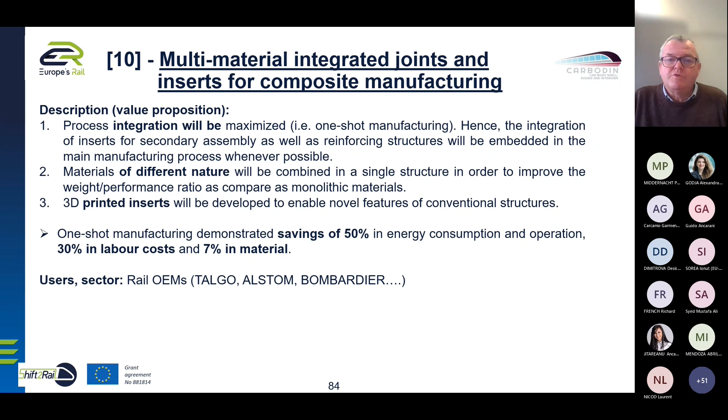Next please. This one is really important because we spoke a lot about the possibility to have modular interiors for the trains. So every 10 years, we will have to change those interiors to adapt to what our customers want. Here you have a very nice example of what can be done. You can see that we have the possibility to modify the interiors without heavy work. So we will save a lot of time changing the interiors, and it will be possible for us to adapt them very quickly by changing the floor, changing everything inside, the position of the seats, for instance, but everything else inside too. This should give our users the possibility to adapt the interiors of the trains quite quickly to new needs of our customers.

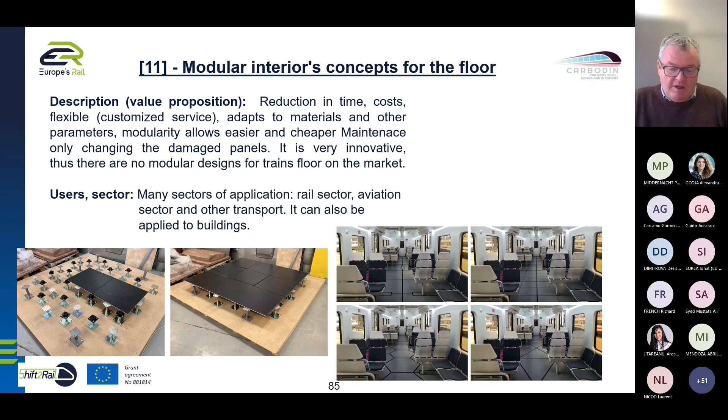Thank you very much, Alain, for the presentation and for the insights on the activities that CARBODIN has been working on, from specific solutions providing better accessibility to the market and to the railway sector in particular, also in interiors, as mentioned at the beginning. Some of these innovations were shown at InnoTrans with these technologies developed, and of course this important aspect also dealing with maintenance and how these car body structures can be better monitored and have maintenance tasks performed in due time. Thank you again for the presentation and for your insights.